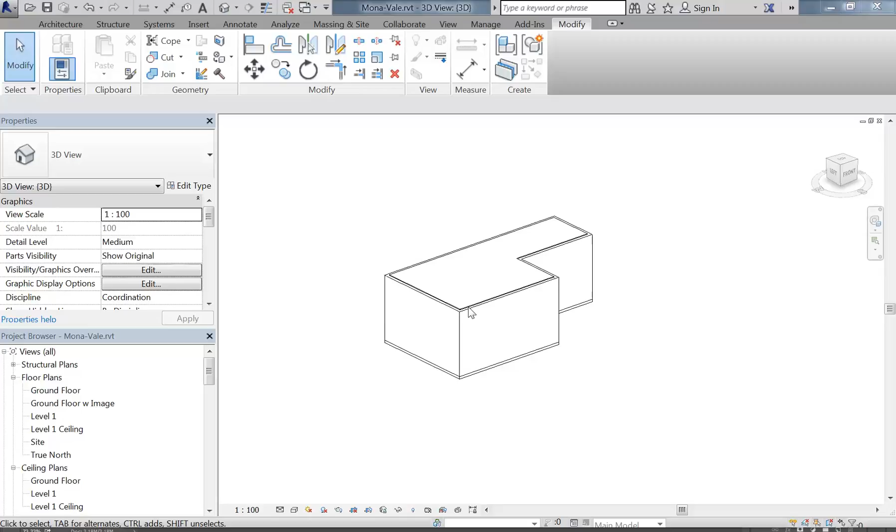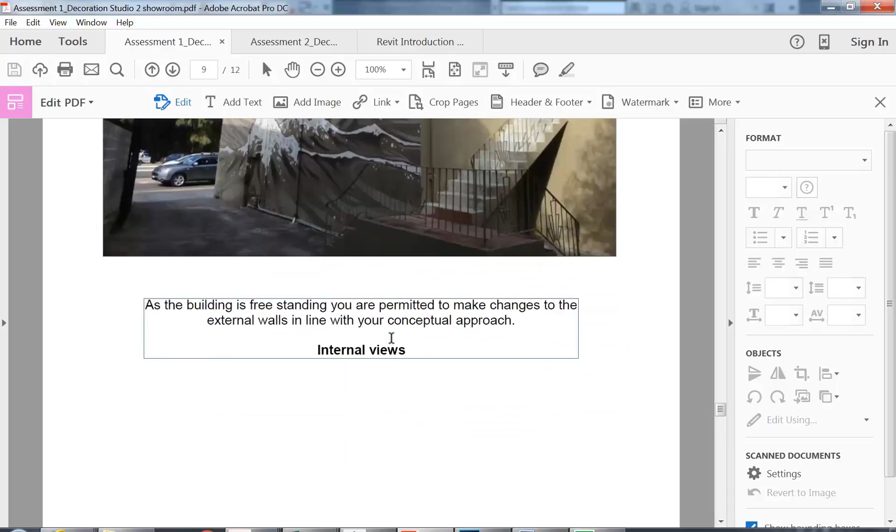Yep. So I've got a flat ceiling there, and that then is going to sit underneath my roof, and we've got then the pictures here. That's a different building, sorry. This picture here, going back, will show us the profile of the roof, but on the parapet wall, and the roof will sit behind that. Now, we don't know the slope. I'm going to have to just guess that.

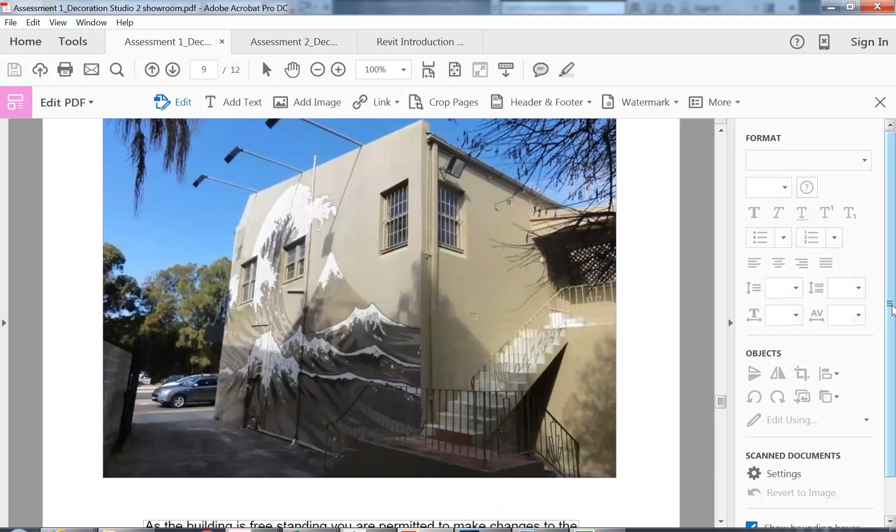And I would actually use a different tool for this normally, except for the fact that at the front there, you've got this kind of nice little detail. Well, don't know if it's that nice, but interesting detail where it slopes up from the side, and you'll need to work out a way of doing that. So I thought that's a good way of really getting used to the way that the roof by footprint tool actually works. And you'll see once I show you, it can give you some interesting results.

Yeah, no, they're just kind of decorative. But it looks like it's part of the wall. Yeah, that is part of the wall. That's a parapet. And then this is really a hip, and it's just the decorative treatment they've chosen. It's not really probably all that nice, or even that common either.

I'd say probably what's happened is they might have even had a parapet going all the way across at one point, and then they've decided to break the roof out to do an eave here later, maybe. Just guessing, but this looks like it could have been Victorian originally. You never know up that way though. There wasn't a lot of Victorian stuff in that area, but there was some. So it could easily have been Victorian. Mona Vale. Yep. Yeah, but there was some up there.

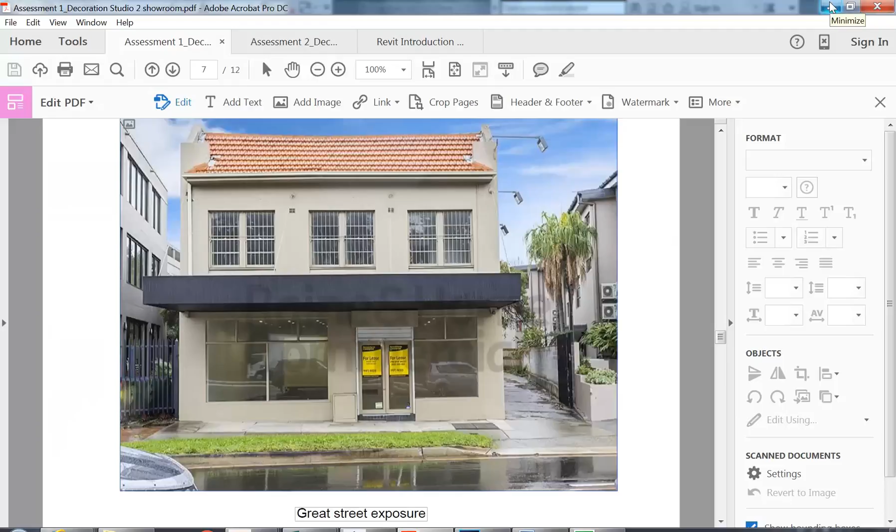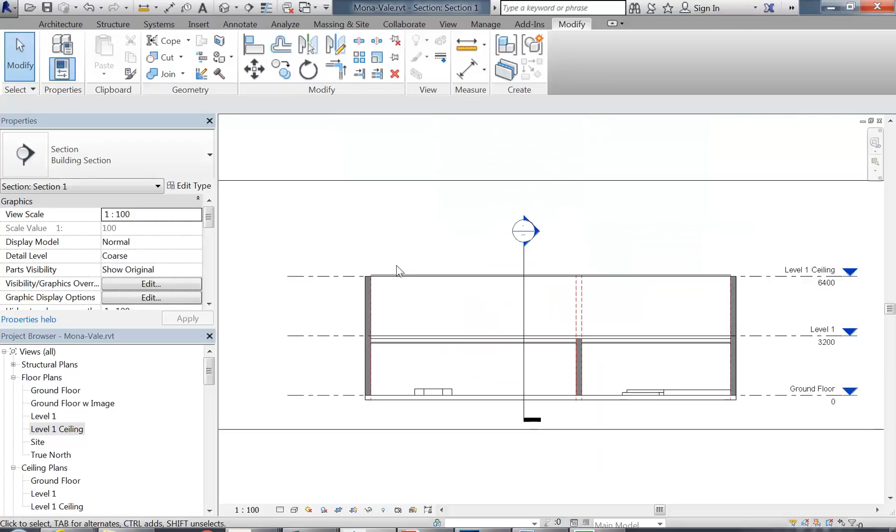So, starting point would be to get the main form in, and then I'll try to show you how to modify it to get the pitch, so also those hip bits on the side. So level one ceiling is the one I've made for my ceiling. But remember, the way that roofs are often made is to have the rafters sitting on the wall at the same height as your ceiling. So you can use the same level. And I'm going to go to the menu and just show you, I'm using roof by footprint.

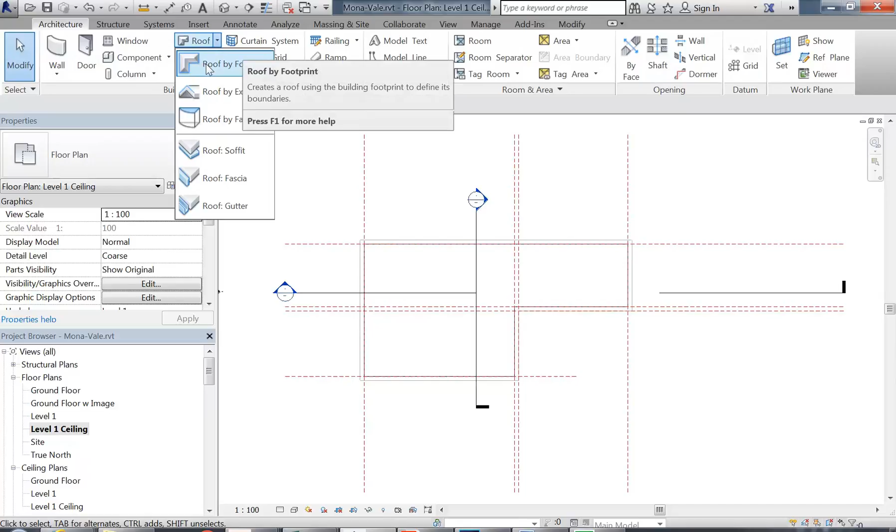And I'm just going to guesstimate those slopes. The first part will be really easy once you see how it makes these forms. So we'll get the slope here and here without much trouble at all. So that's the easy part. I'm going to use pick walls and pick the outside edge of this wall. And it's probably more than 30 degrees. I'd say it looks like about 60 at the front. And then at the back,

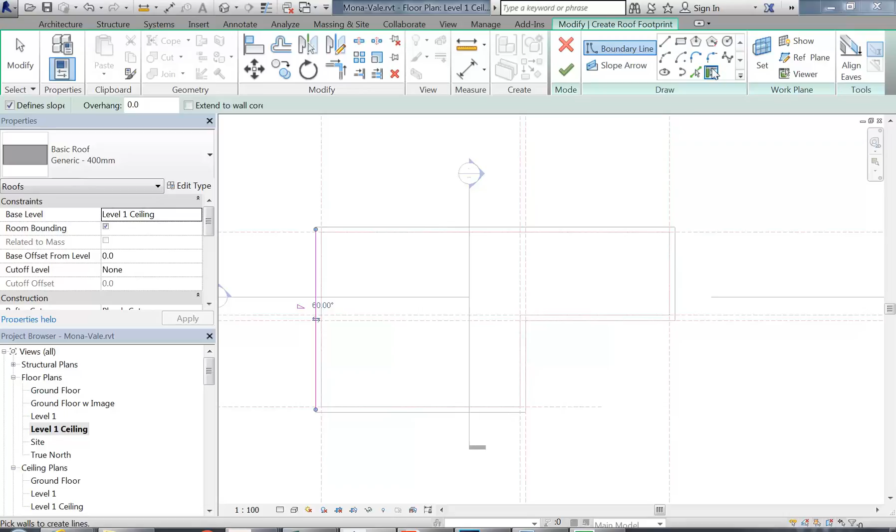or here actually, let's look at that image again. So to there is the first roof, and then we've got another roof at the back that's different. In fact, it's probably not even two-story there, so I've made a mistake, but again, easy to change with Revit. So pick walls again. I'm going to pick this wall, and we'll try 10. It's probably not right, but just to give you the basic idea. So they're the two edges I definitely need a slope, and now I can turn the slope off and pick the walls at the top.

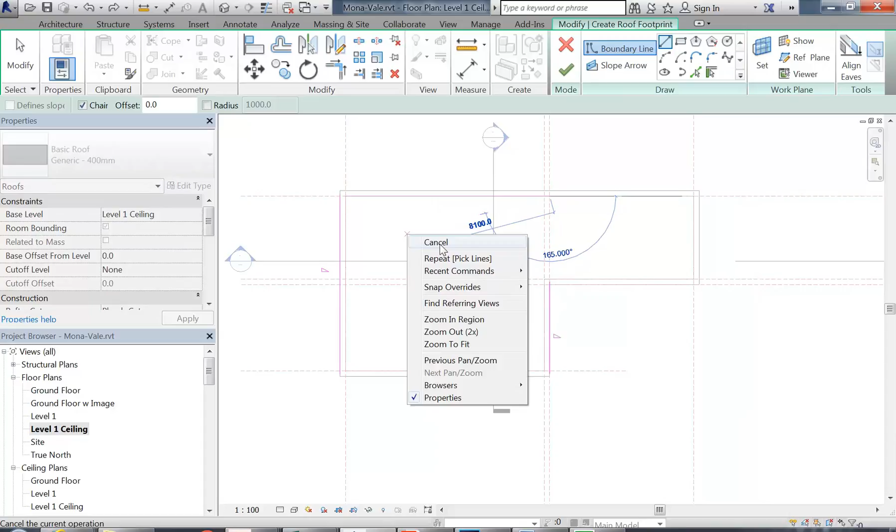Now there, that's on the wrong side, but notice how if I flip it, it's going to flip this one too, and I don't want that. So when the wall or the edge you pick using pick walls won't go where you want it to, remember you can always use pick lines, or sometimes it's even easier just to draw a line. So you don't have to use pick walls, and drawing lines is fine. So there, I've drawn the edge where I want it to go. Remember, the roof edge needs to sit inside the walls here at the top and the bottom.

So here the roof comes out beyond. Now I'm going to fix that side too in a minute, if you're wondering about the eaves. We'll look at that in a second. But I just want to get you started. So if I use trim, now I can join these together and make a simplified version of the roof. So that's a rectangle.

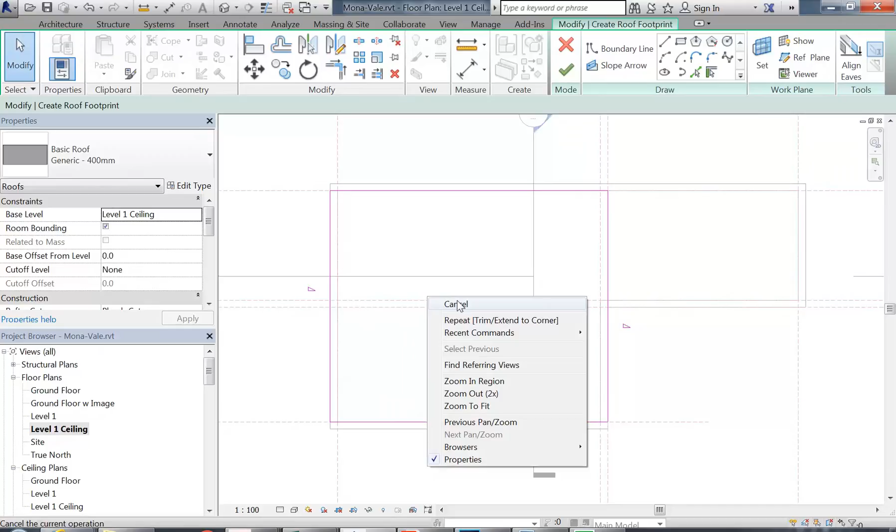And again, just want to make it really clear how the slopes work. So the slope is just again from the left and the right, nothing from the top and the bottom, and those top and bottom edges sit inside the walls. These two edges sit on the outside of the walls. Tick to finish, and then in 3D, got something similar to what you can see in the image. So you've got a greater slope there, and then a lesser angle here.

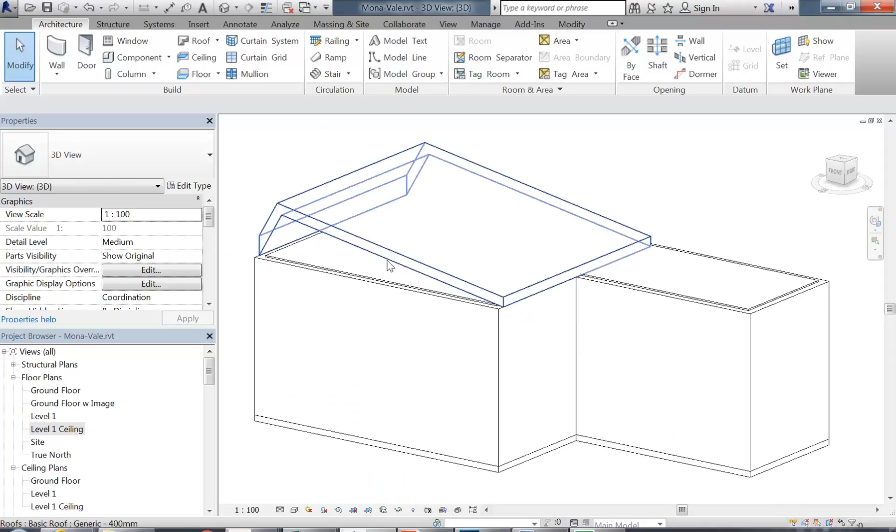So not far off actually, but still probably not quite right. So I can always select that, edit footprint, and I'll try, maybe it's 58 degrees. And maybe this is a bit less too, maybe that's, oh no, that's pretty steep. So I'm going to tick to finish and just see if that's better. Yeah, probably a bit closer. And now we can experiment with that.

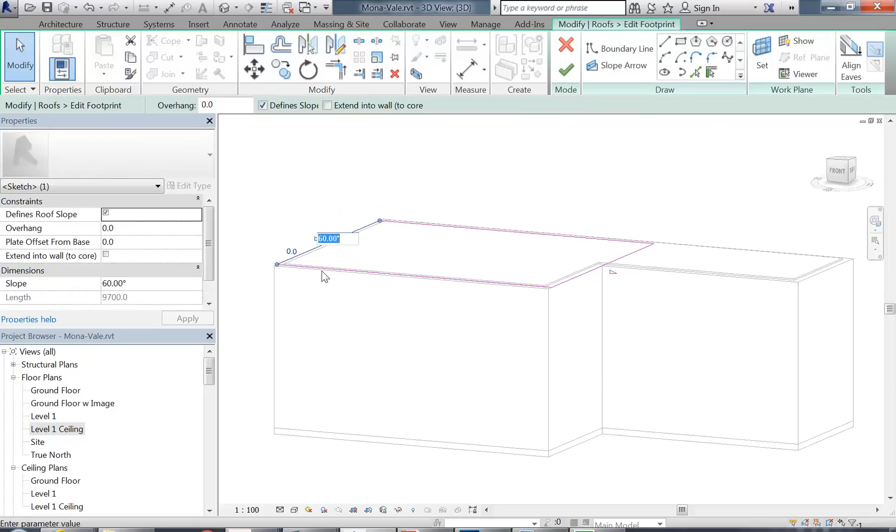And I think actually that does need to slope a bit more. So edit footprint, and I'll change that to 55. That's probably better. So notice how this ridge height is just wherever those two angles join together. And I might make the roof thickness less by just choosing one of these thinner roofs. Generic 125 probably is okay.

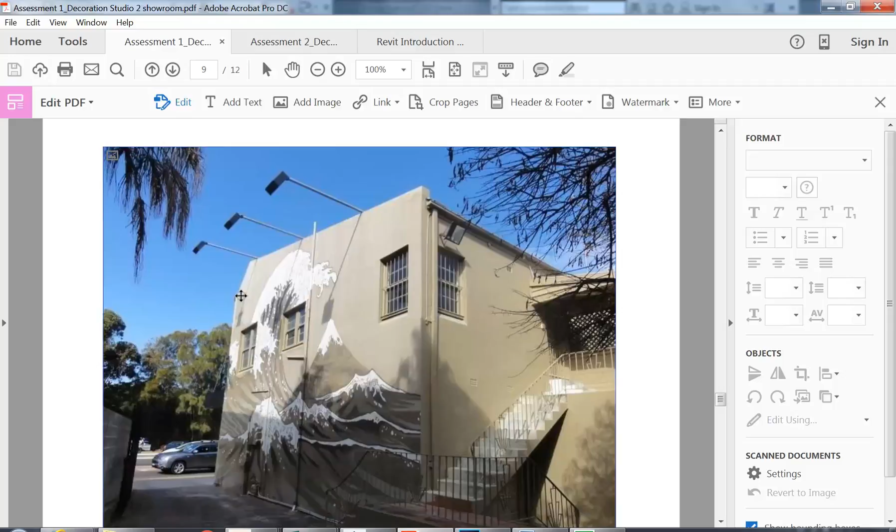Right, so then we've got, and actually let's even look at that a bit more. That could be maybe even 50. So I just want to try and get that pretty close before going much further, because the next bit is a bit more complicated. So I've got a slope there that I'm happy with. But then looking at the front facade, we've got that strange eave. So how do you get that to work?

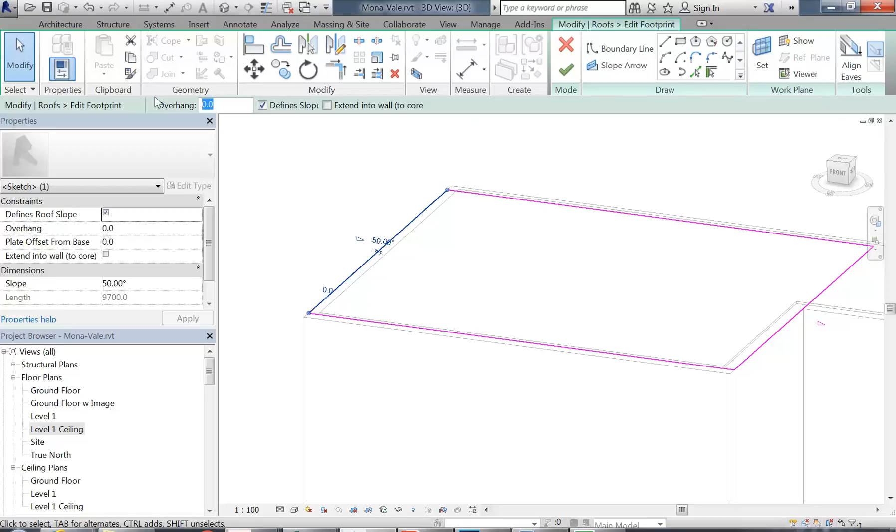So back to the roof tool and edit footprint. I'll start by selecting this edge. And if you're wondering why they even give you this pick walls option instead of just letting you use pick lines, it's so that you can put in automatic overhangs and things like that, which you don't get with the other options. So there I can put in what I think the eave is, which is maybe about 400. And it'll just bring that edge out automatically from the wall. Tick to finish. And there you can see it's done that.

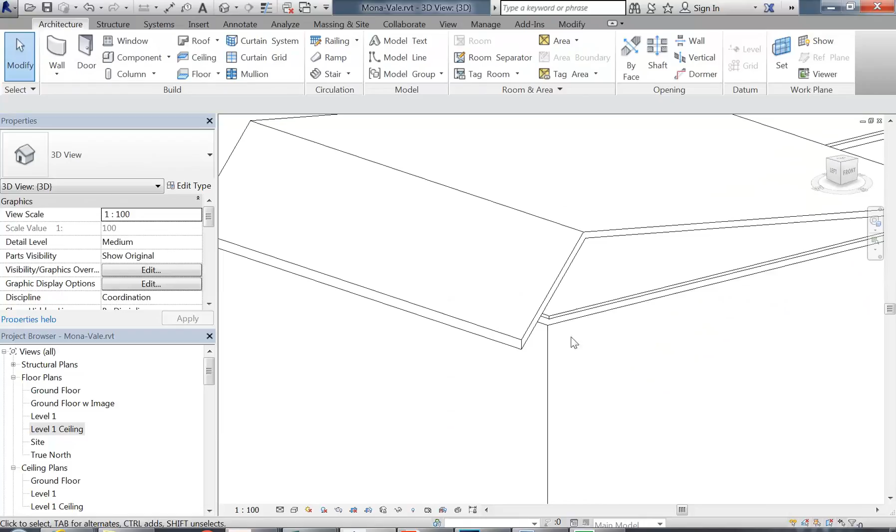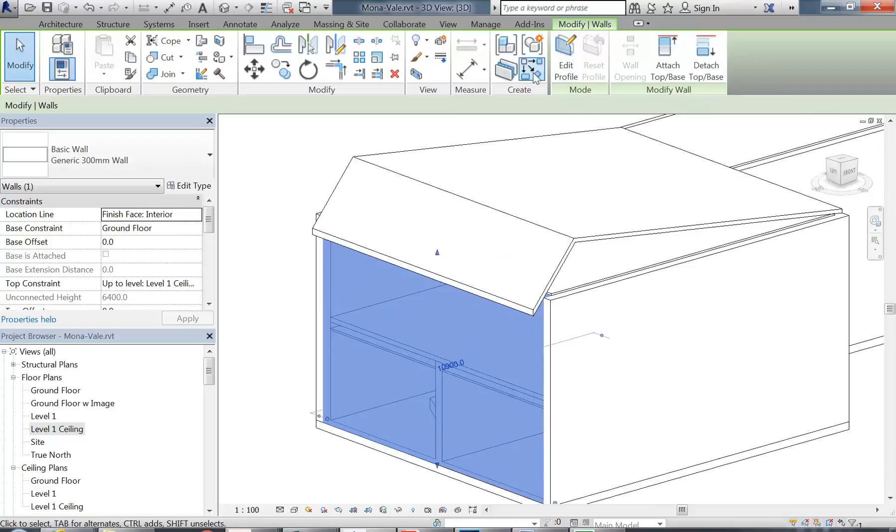So now I want the little bit of the parapet that comes around there. So with the wall selected. So any wall that you make in Revit will give you this option, which is extremely useful, to change the shape of the wall in elevation. So again, clicking anywhere on the edge of this wall, that option there, edit profile, is going to come up. One of the most useful options in Revit. You'll see you'll use this all the time. And I'm going to go into the plan view.

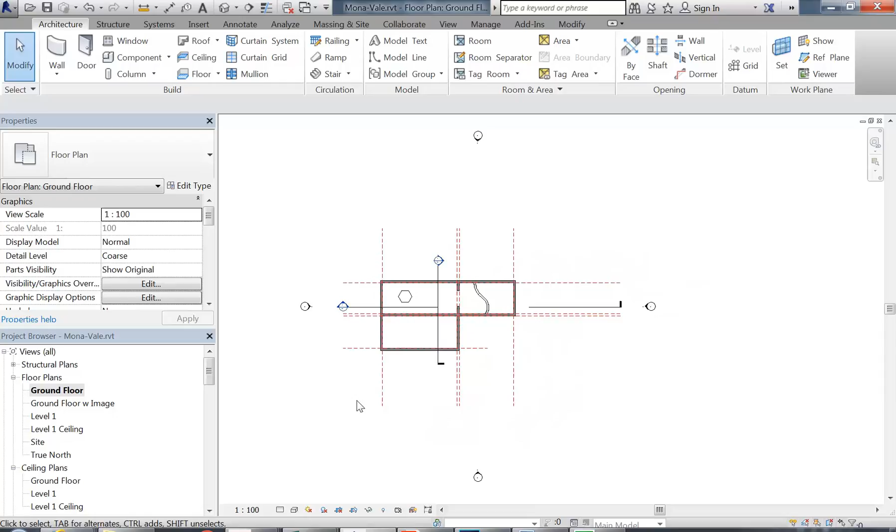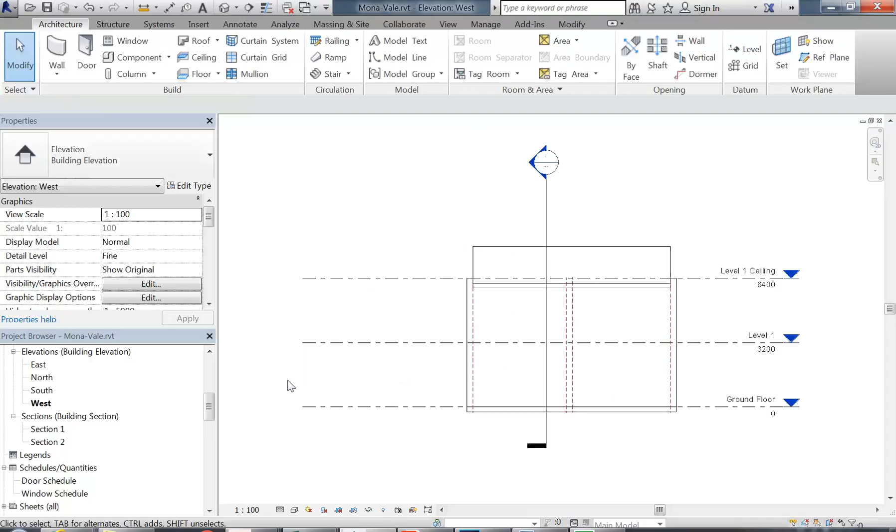So maybe just thinking a bit more about the elevations. Which side was I just looking at? Which is the front? Which elevation? North, south, east or west? West, exactly. That's right. So that's the way you want to be thinking. So west elevation there. I can go to it in the project browser and just double click on west. But if you just want to look at the arrows or look at the views in your plan, you can double click on the arrowhead. There's a quick way of opening up those.

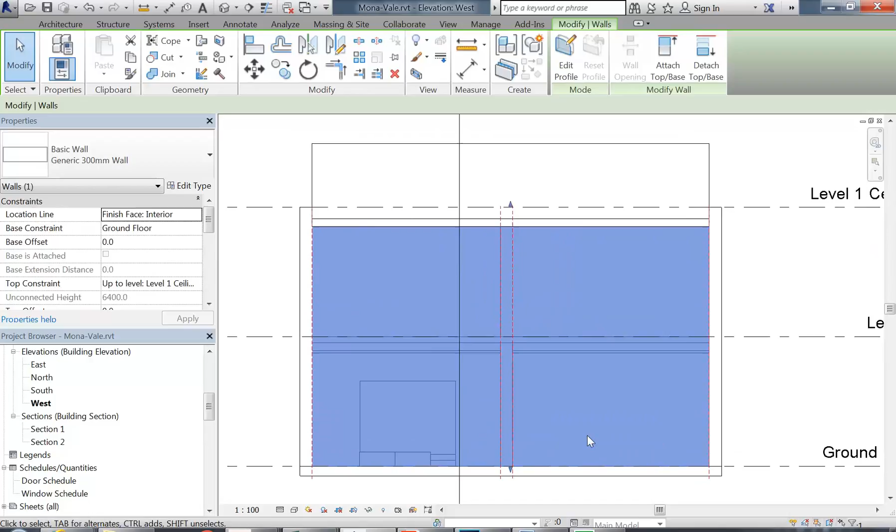And now I can see my wall from the front and just select it. I could click on the edge, but it's giving me the floor. So remember, the option key tab will let you switch to something else, in this case the wall. And then again I can use that edit profile tool and draw in the parapet, just like you can see it in the picture. Now don't worry about the fact that it's joining in the middle, just ignore that. Revit will take care of that.

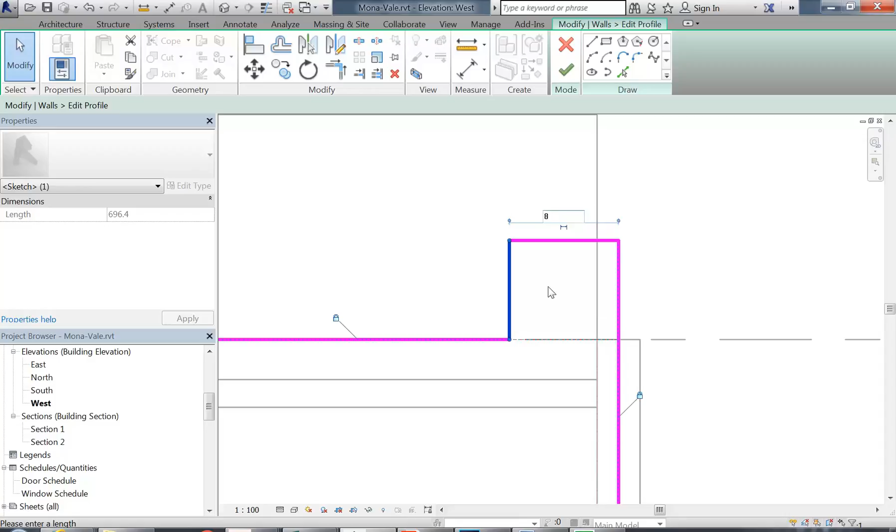So I'm going to join these together. I'm not being too fussy about the exact sizes here. I might make that a round number just so I can do the same on the other side. 800, that'll do. Okay, so things like this, you're not going to be changing that part of the building most likely, so don't be too fussy about the way you draw it. It's just to give an impression.

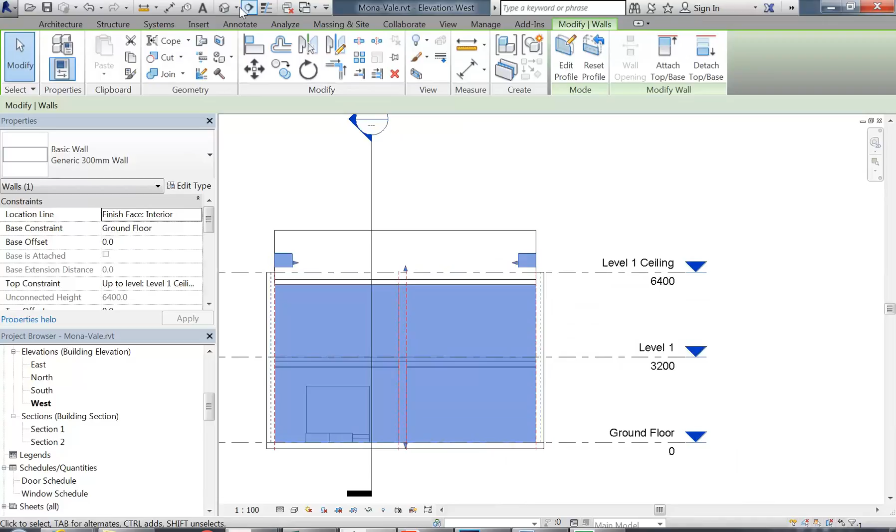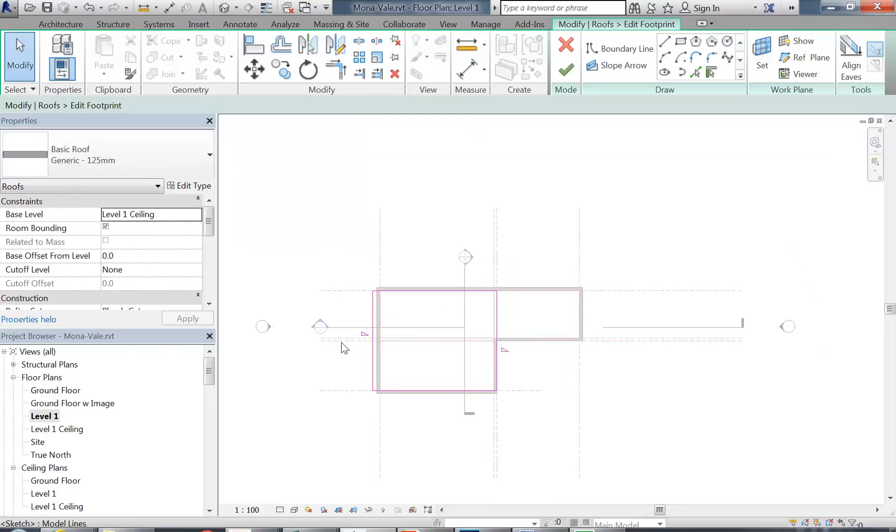So I've added that to my walls, and if I finish it now and look in 3D, you can see that part projecting. We're going to bring this wall up separately. So I'll leave that for now. But then what I wanted to show you with the roof is that I can go back again to Edit Footprint. So in Plan, think about what's happening with the slopes. Can you think about where it needs to slope from to get these little bits here?

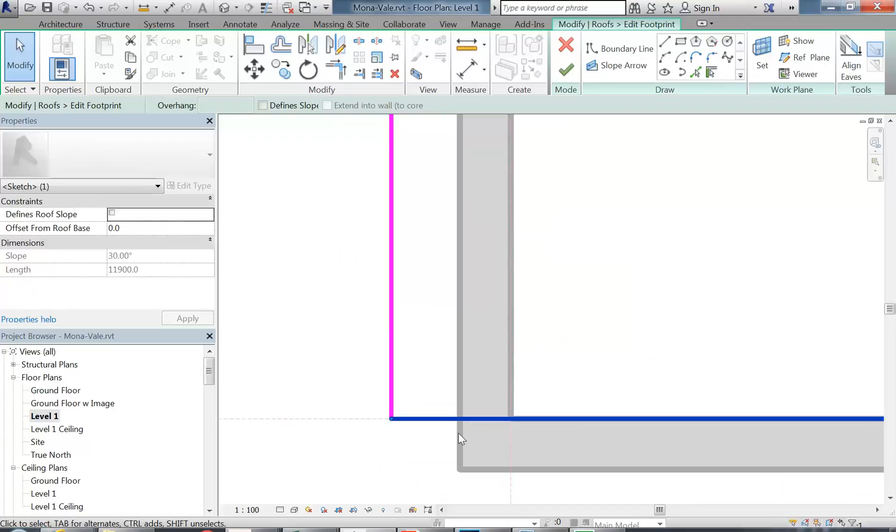Well, from the end of that little wall, the top, yeah, the parapet, from just near there, yeah, that's right. So yeah, exactly there. So this part here, the part that sticks out, needs to slope. So I've got to break that line so that I can make just that part of it slope. And so if I use split element, then I can break it there and up here as well. And then I need to know the slope here was 30. It's got to match. So I'm going to choose this edge, tick define slope, and make it the same.

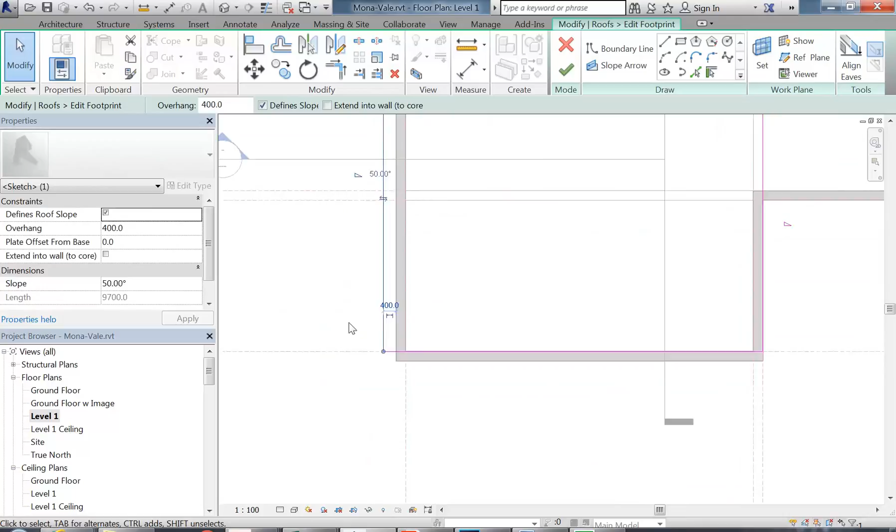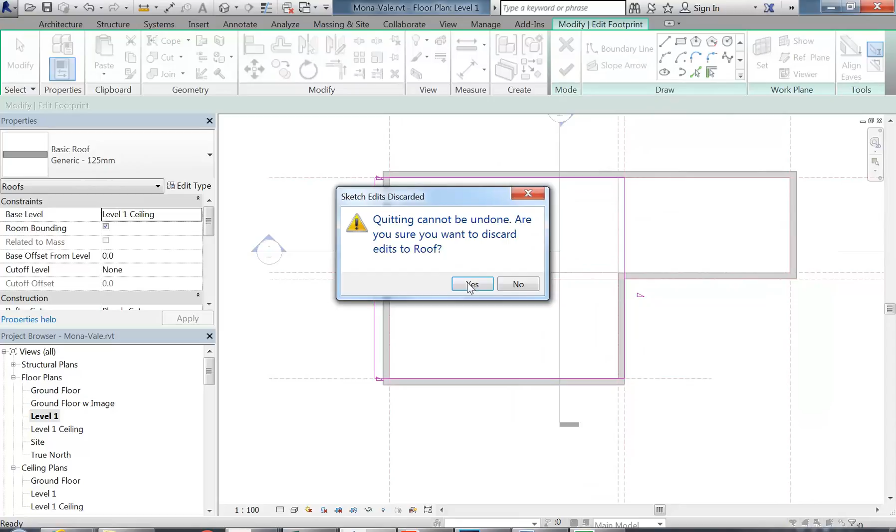So same here, tick defines slope, and make it 50. Done. So tick to finish. Now it's got a problem. This happens sometimes. It can't make it as one roof. Right, so the trick there is to make two roof shapes and join them together, which is always an option. So, okay, I'm going to cancel that. Sometimes it is just too confusing for Revit.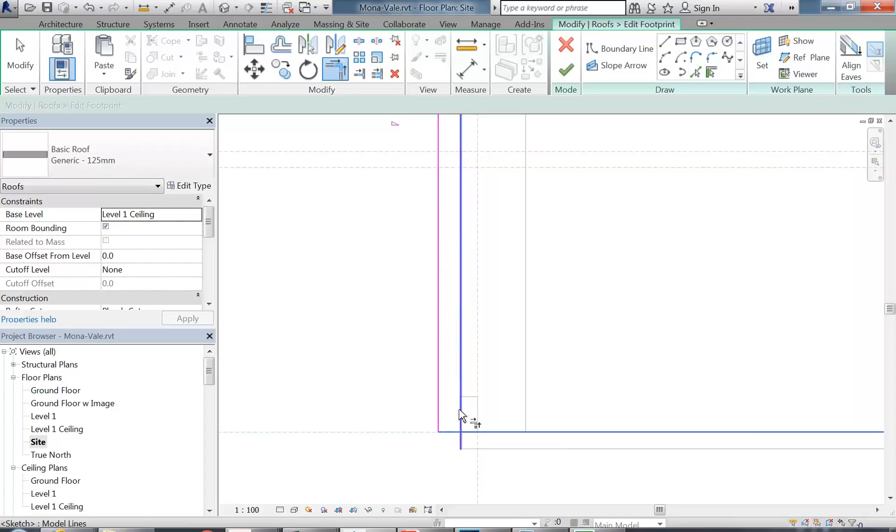Okay, so trick there. Copy to clipboard, and then paste aligned to same place. And this is something you need to do quite often in Revit, so that you can make two copies in the same place. And then I can just go and edit the first one, get rid of these lines, and then make it just for that first section. And so quite often this is what you need to do when you have different roof shapes. You can make more than one roof, and again just connect them afterwards.

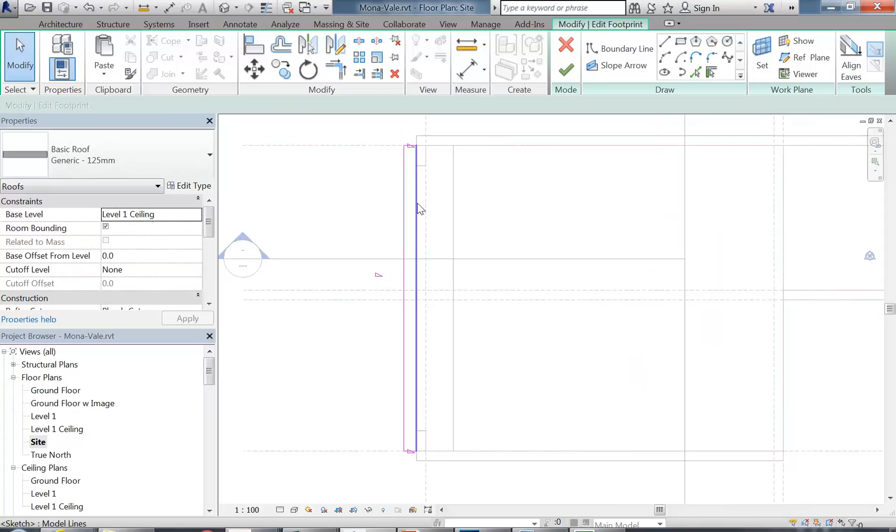So define slope for both of those, and they'll all be 50 degrees. Why doesn't it? That's not right. It should be able to make that no problem. 50. My depth isn't enough. That's why it doesn't like that. So this edge here would need to be further out.

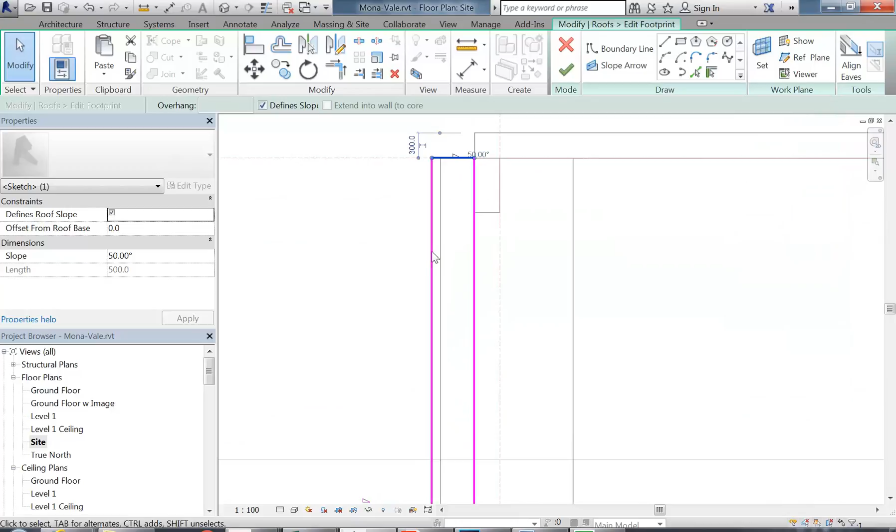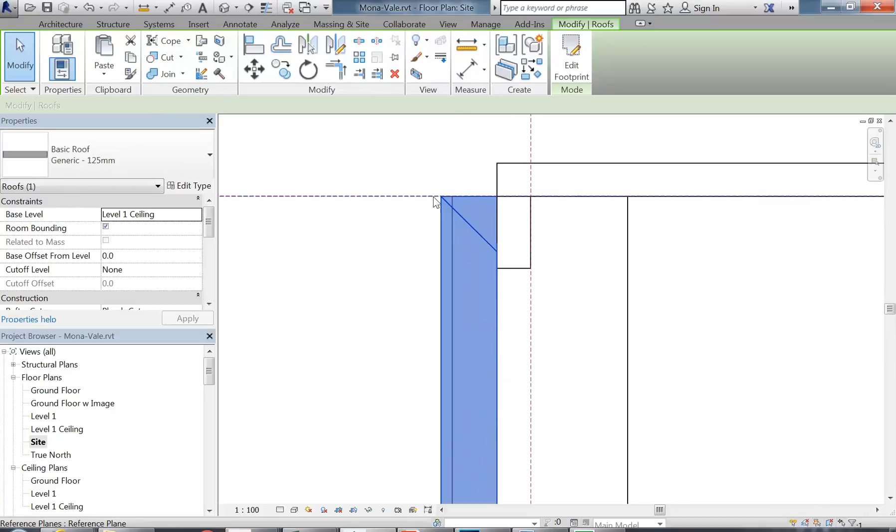There we are. And so even there, okay, this is where it gets a bit technical. This edge here is done with, don't want to get too technical. I'm just going to delete that line and draw it again. It's because I made it with pick walls, and it projects from a different height. And so the easiest solution there is just to redraw it as a regular line, and then it will be capable of doing what I want. So notice how now the line there is on from the corner, not from the setback. And so now this roof can be modified to not include the overhang.

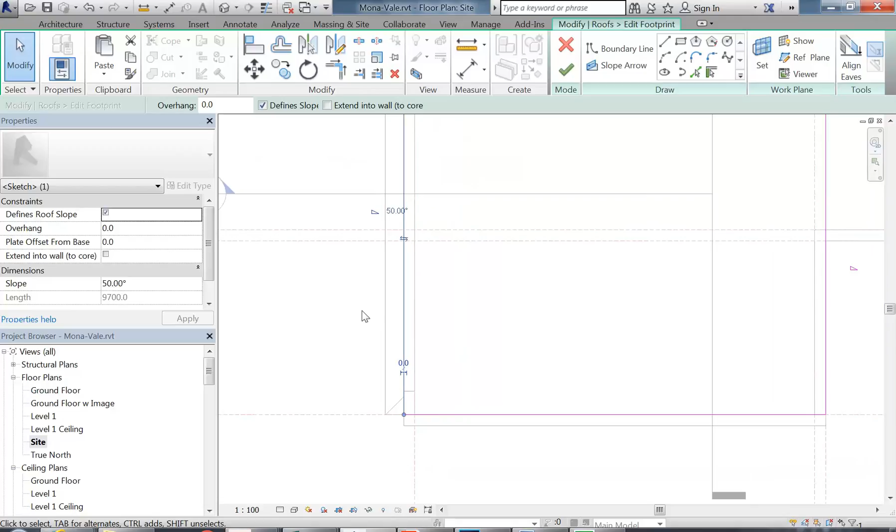So you bring that one back in? Yeah, and it could even go behind the parapet, optionally. No, I won't do that. I'll just leave it there. It'll be simpler. And so then back to my section, and this can come down now, just to line up with the move tool, and then join geometry. We'll make them appear as one continuous roof. There we are.

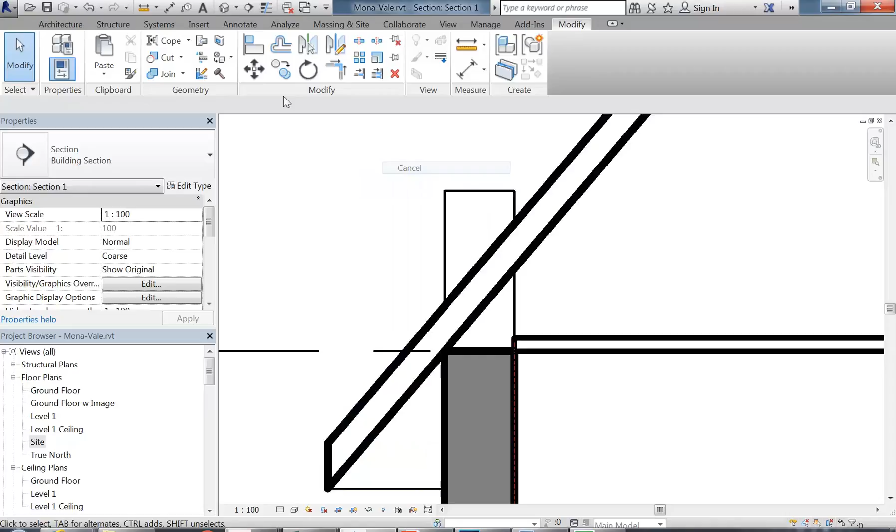And actually they might even have different slopes. That could change slope. Actually you can see there the parapet's a bit steeper than the roof angle. So I'll go back and adjust that later maybe, but just want to give you the basic idea. So thinking about the tools I've just been showing you, what do you think you could possibly do then to make the wall on the side look like that? So I want to add this slope to the top of the wall. So you want it to go over, you want it to have an overhang. Yeah, it's a parapet extending above the roof. That's what a parapet is.

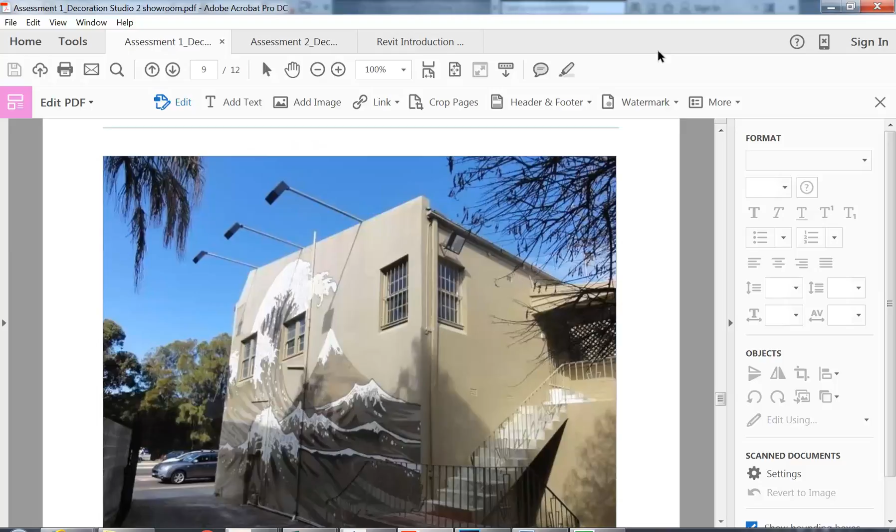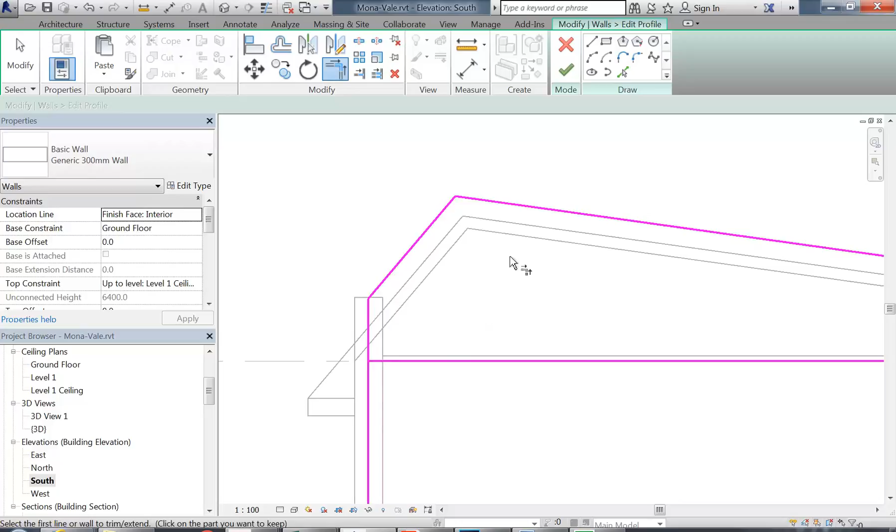So, same tool I used before to do the other parapet. Edit profile. Yeah. So if I go to edit profile now, this is usually the method, and same with your ceilings. Make the roof to get the slope, and then you can follow that with your walls and your ceilings and anything else. And so now I can pick lines and put an offset. I'm just going to say 200. Pick the edge of my roof, and it'll follow that angle, and then I can join these lines like that. And we don't need that one anymore. Tick to finish. There we go.

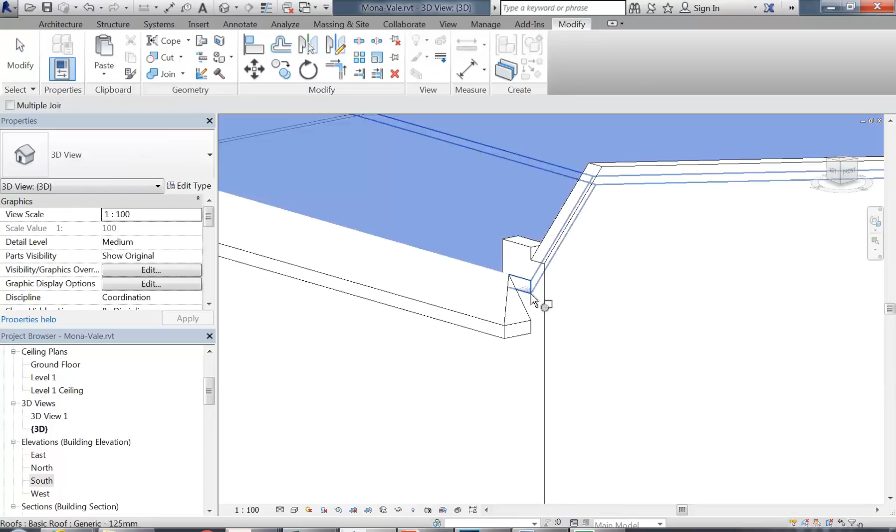So probably need to fine tune some of these heights to join it all together properly, and look at joining the roof and the wall there. Or no, sorry, I'll show you another way of doing that later. That actually needs to come back. And actually I'll show you that now. It's a really quick thing. So there, to go around the parapet, it's a bit of a trick.

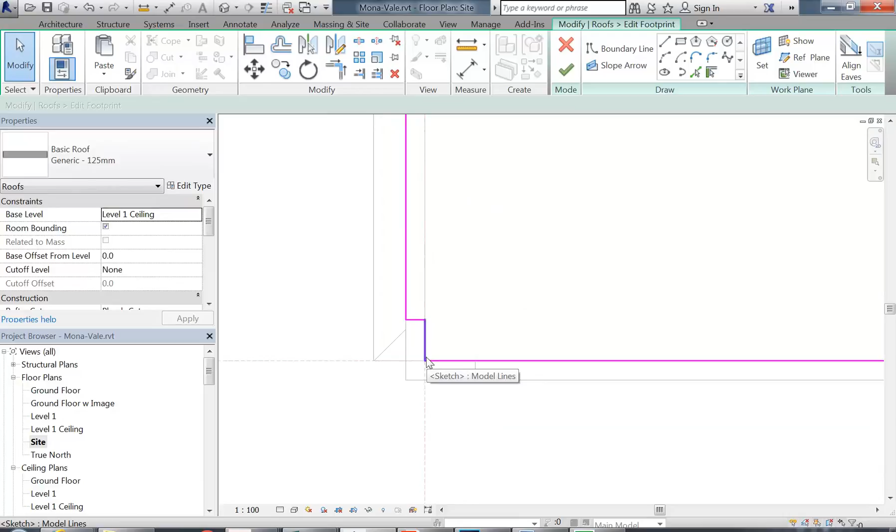You need to have the edge like this, but where people get into trouble is overthinking it and thinking that you need to have the slope from here, when you don't. It will work properly if you just have the slope from this main edge at the front and don't put a slope on anything else except the back. So back to here, I can just draw, in fact I'll just draw lines, I won't even use pick lines.

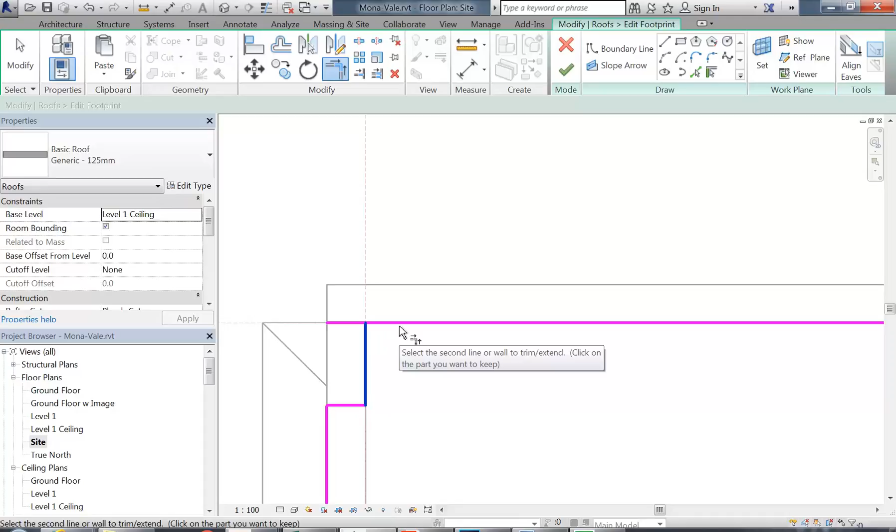So you're just trying to think about how it is built in reality. You don't always have to model it exactly that way, but usually it's going to be easiest if you can. So there we are, that's brought the roof back behind the wall. And then the very final thing, we've got a bit of a funny join there.

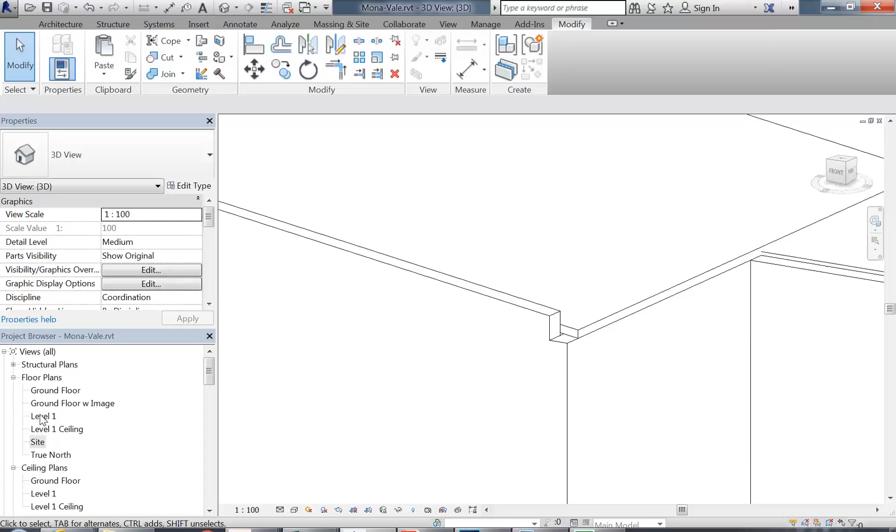So there's one last option you probably haven't thought about a lot because you would have been using the automatic joining. If you have a look in your plan view, you can't tell just by looking at it how those walls are joining together. We know they're joining together, but which wall is going through to the end, you don't know. If I select one of the walls though, then you can tell. This one is. This wall stops there.

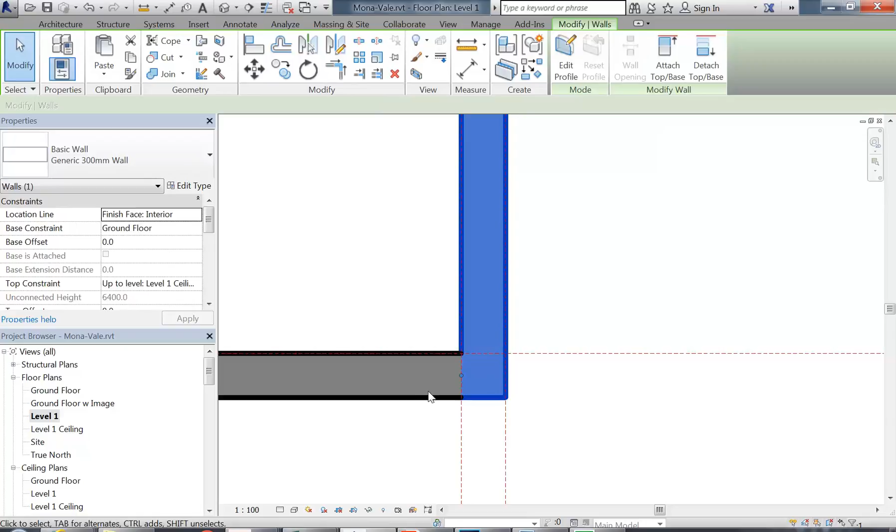So how do you think Revit decides that? How do you think it decides which wall gets to go to the end and which wall doesn't? It's to do with the direction you draw the walls in the first place. So often you'll need to come back and adjust that afterwards, and you have the wall joins tool for that. So when you're doing things like parapet walls for roof shapes like this, you'll often need to use this option. It's simple to use.

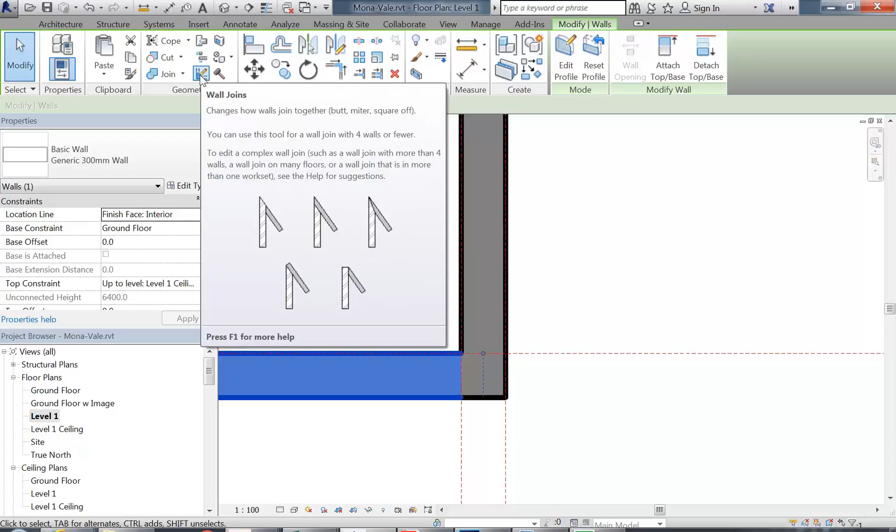You just go to wall joins. When you hover over any connected walls like this, it will give you a little rectangle to show you that it's found a wall join. Click to select it, and then it will show you which wall is extending to the corner. And often here you can just use the next option to cycle through the different possibilities.

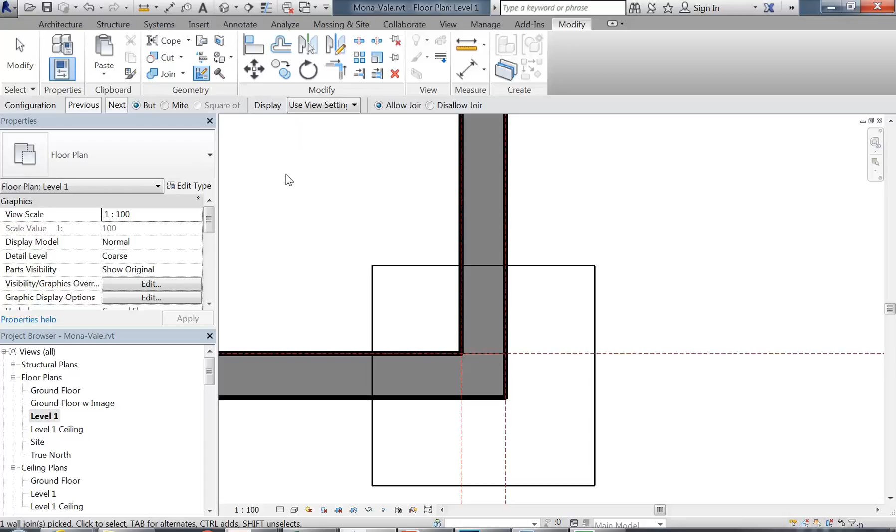If you're interested in construction, have a look at the different options you have for mitre and things like that, which can be interesting as well. But here, butt is the option you should have, and then again just using next, you'll probably get the option you want first go. So that's it, and I'll go back and show you now in 3D. That's right. So do the same on the other side. And so we're getting pretty close already to the shape of the building. So might have to look at doors and windows later, but that should give you a starting point.

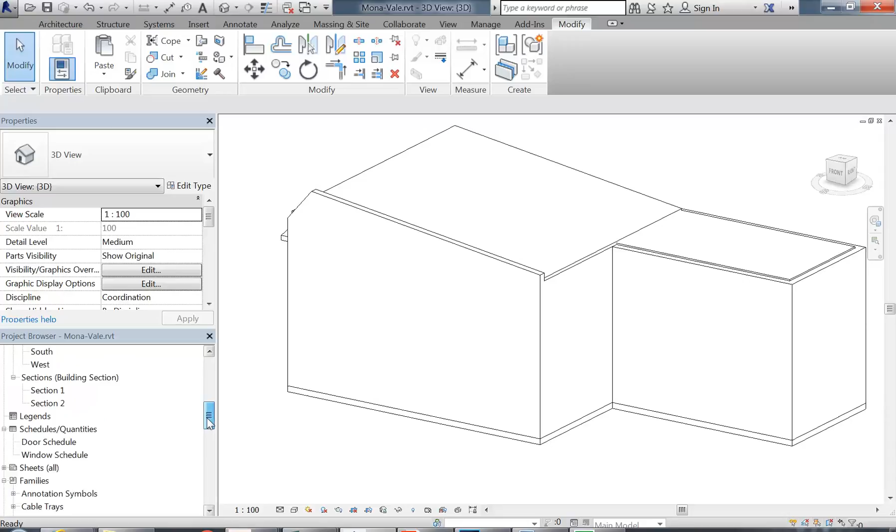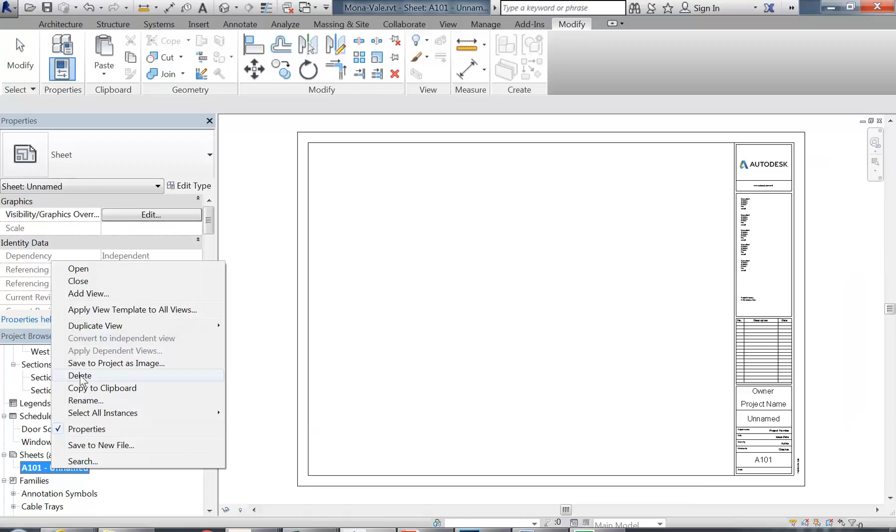And maybe very quickly, because we're going to run out of time otherwise, I'll just show you a very quick way of setting up your sheets, which we did earlier, but I just want to make sure you can all do this. You've got normally a default sheet set to A0, which is useless, because it's got this Autodesk title block anyway. So just get into the habit of deleting that, and that'll force you to make a page that has a size you've chosen. So again, that one there, A101, unnamed, in your sheets category. You right click and delete, yep, first go.

And then right click on sheets all again and choose new sheet. Then load. And I've made a lot of extra title blocks for you in the Revit library folder there. Then you have title blocks and you'll see there all these extra page sizes.

So it seems like you need to do 1 to 50s. Is that what everyone's going to need? No? Oh, yeah, true. Well, for interiors, this one says 1 to 100. The second stage of this is 1 to 50. First stage, yeah. Look, 1 to 50 is pretty standard for interiors, but it's good to know how to do 1 to 100 as well. So then, which one is it, A1 or A2? So I think A2 should fit, but A1 will give you a bit more. No, A2 should be right. So I'm going to just do A2 for now. A2 landscape.

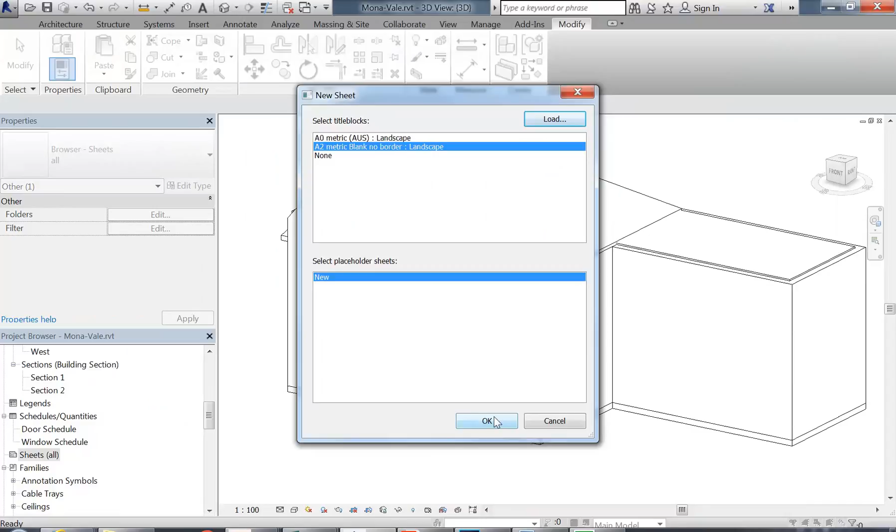So I've got here this A2 metric blank, no border, which is just completely blank, and it's landscape. So if I double click there, and OK, blank page, and even at this stage, without very much done, I could drag in a floor plan and see if it fits onto that page. So it definitely fits, but that's 1 to 100, and it seems like it's taking up most of the page.

So what do you think you could do to make it fit better when it's 1 to 50? Because at 1 to 100, it's only just fitting. If I make it 1 to 50, do you remember what to do there? You can always go back into your view.

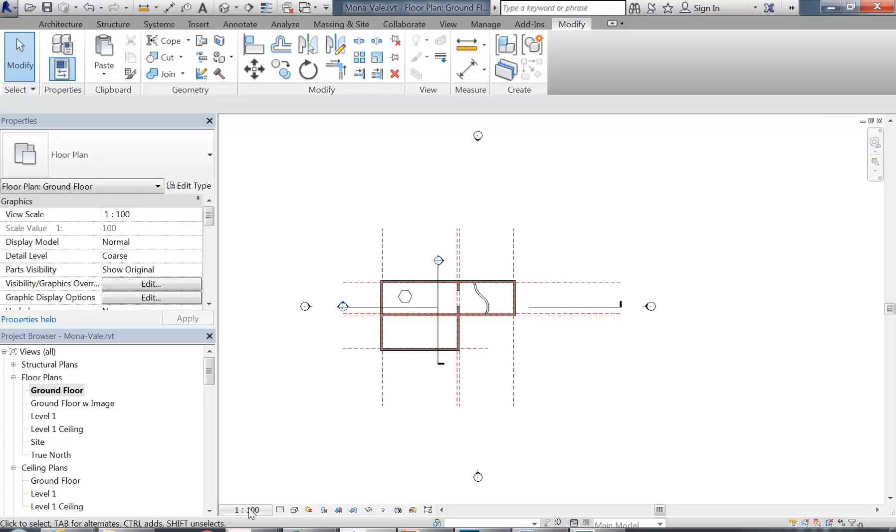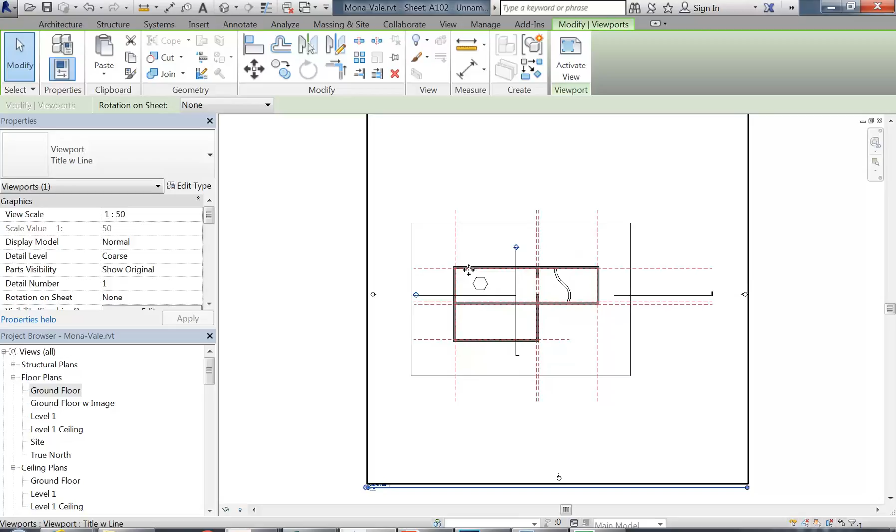And then I'm going to drag that across again. So think about what you're trying to show. This is what I'm trying to show. That's my page border, so my plan should fit on this page size. But I've got all this other stuff around the outside that's making it take up more room than it needs to.

So a good option there when you're first setting it up is just delete it from the page and go back and fix it in the view. So yeah, delete the view, that's fine. You can delete the view off the page, that's okay. So I'm going to duplicate this view, and hopefully this is something you'll get used to the more you do the class with me, because I do this all the time.

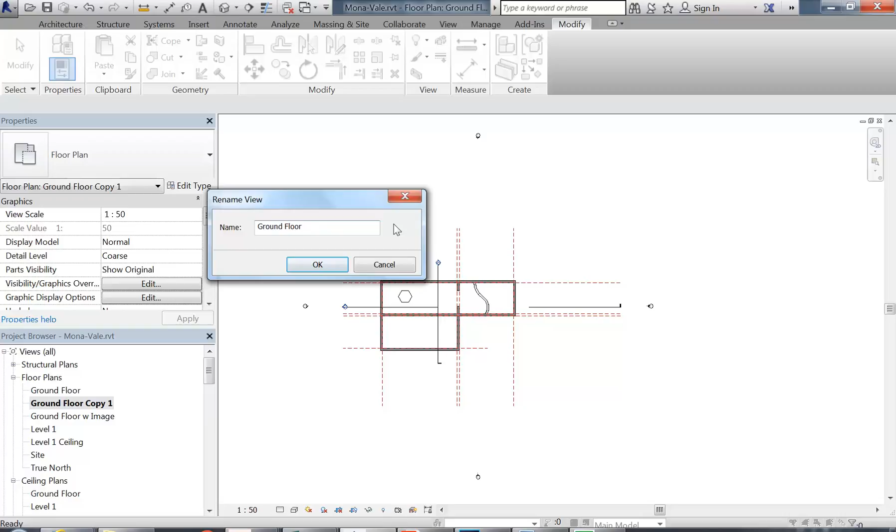Right click on any view and you can choose duplicate view, and in this case duplicate is all I need. Right click and choose rename and call this ground floor print. So I'll set my scale, make sure that's 1 to 50. The reference planes can be hidden. So if you select one, right click, hide in view, category. That'll hide all of them.

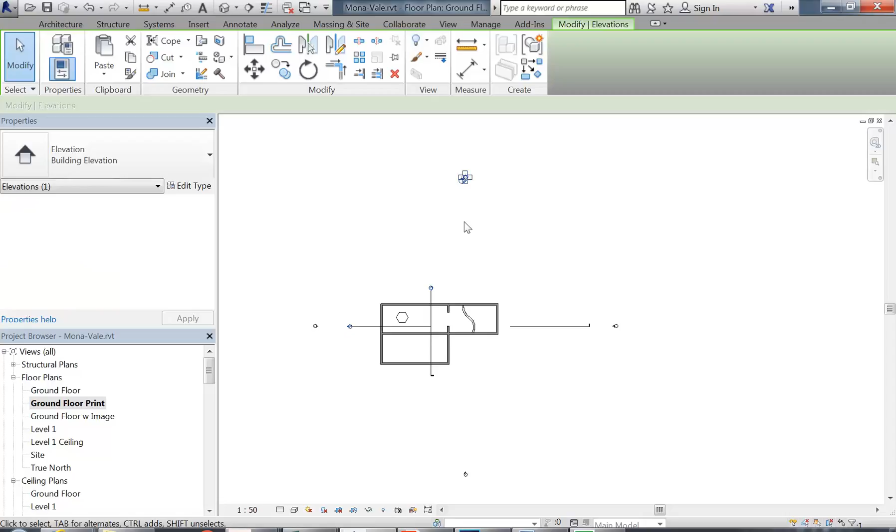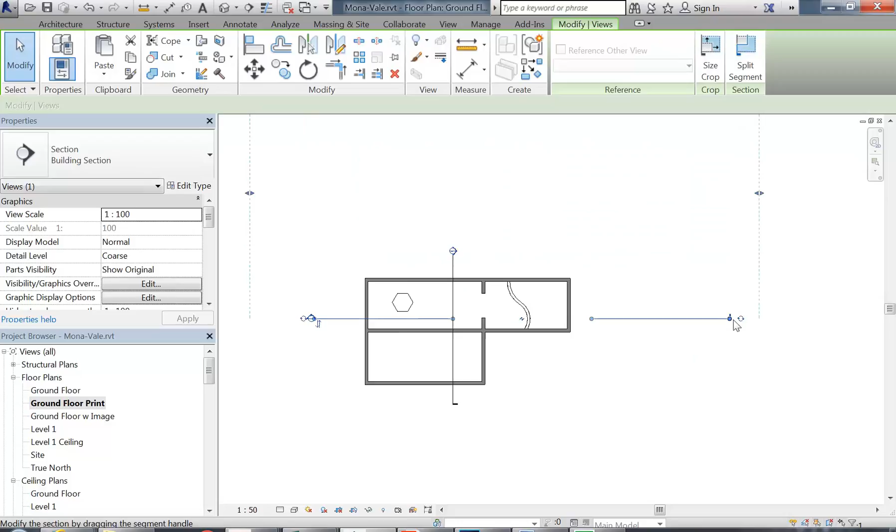What about the elevations? Do you think for an interior design project you need to show exterior elevation symbols in your floor plan? These symbols? No. For interiors? No, definitely not. You might need interior elevation symbols later, but not exterior. So again, right click on those, hide in view, category. Take out anything you don't think is necessary. Section lines, probably do want those. So shorten them so they're not too long. So all of these things make the plan take up less space on the page.

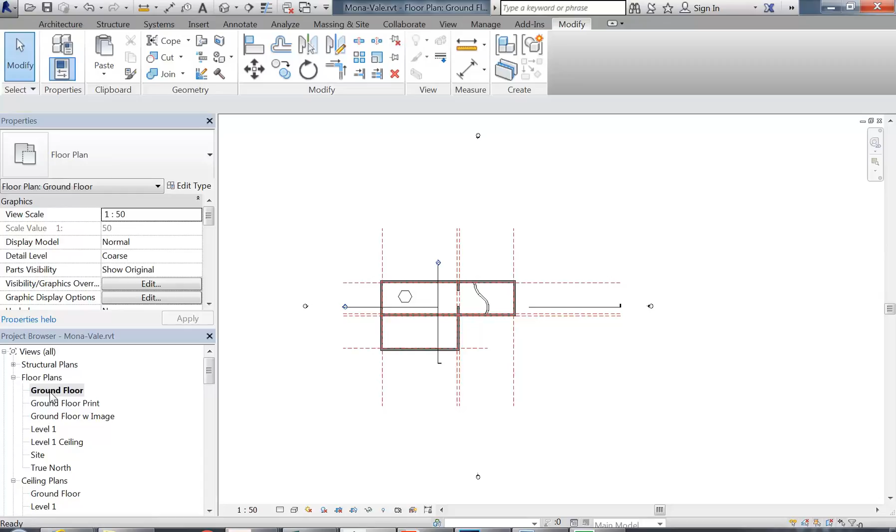Whenever you change the ground floor plan, they will automatically change the print? No, that's the whole point. So if I go back to my original ground floor, you can see it has everything still showing. That's why I duplicated the view, so I can just change the graphics here. But if I go and add walls, they will show up in all of the views. Okay. So it's only these graphical things that are different. Yeah, but I mean, if the ground floor walls layout changes? Oh yes, that will change. Yeah, exactly. That's right.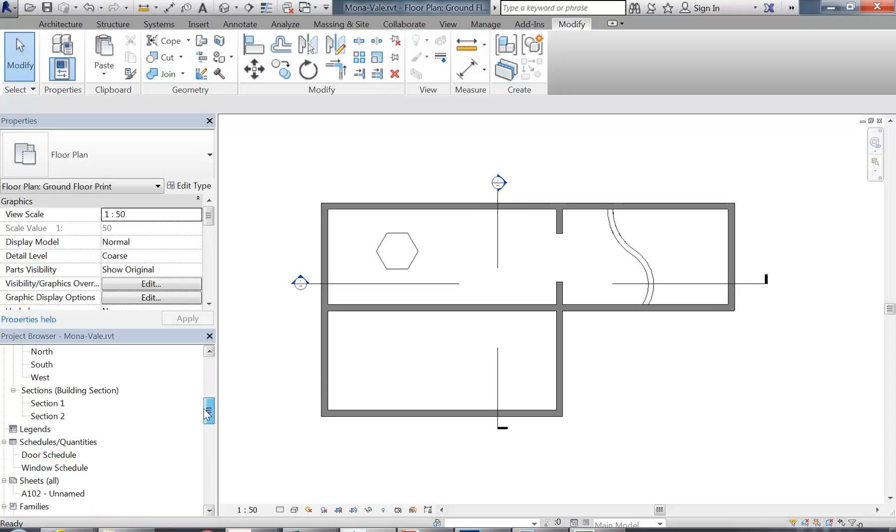Okay, so see how much cleaner that is? That's my ground floor plan with the things I don't need hidden. And if I then go back to my sheet that I know is A2 and drag ground floor print onto that page, how much better is that? So that's ready to print, and that will always be there.

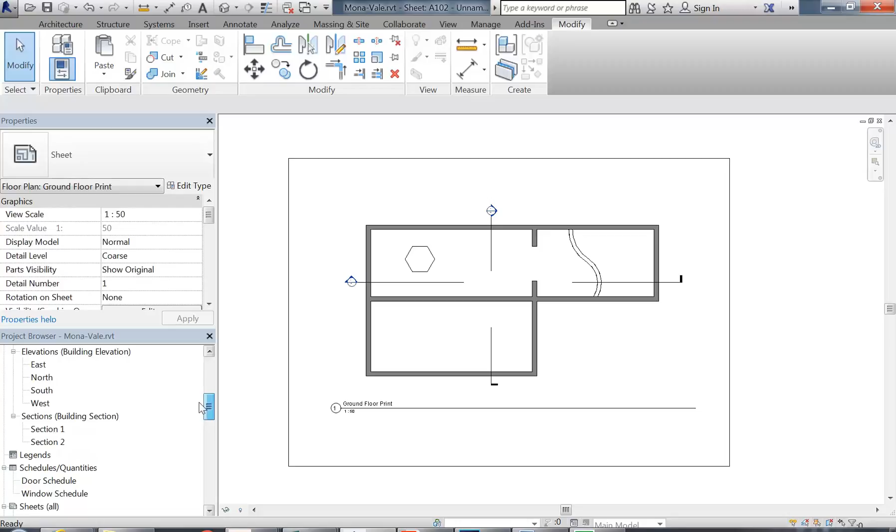And so what I recommend usually is that you set these views up before you try and do all of your design, or even before you model the whole existing building, because you can do this at a really early stage. And don't just do it for your ground floor plan, do it for all of your floor plans and your sections and other views as well. So maybe I'll just repeat that process for a section view, because it should then make it clear to you how organised your views are.

Can you go back a step? I got lost. I deleted my sheet. Yep. And then you went to load. Where did you load? Yeah, so once you go there, right click and then new sheet, and then load at the top. Yeah, and then go to the title blocks folder in the Revit library. So that's your default library, but if you go to Revit library on the P drive, there's more.

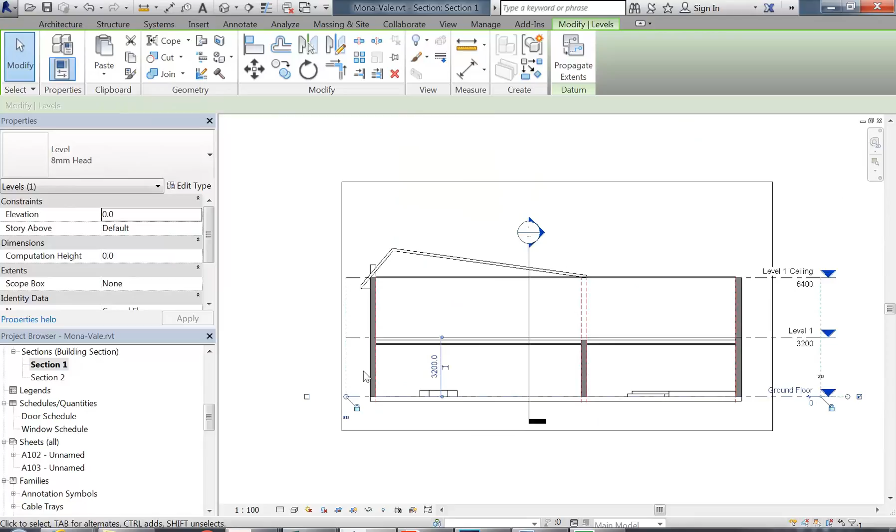Okay, so I'll open up a section view so that you can see it probably doesn't need as much tidying up as the floor plan usually, but you can still do some things like shortening the levels and maybe bringing the outside border in. And maybe the section line there could be hidden just like I hid the other things in the plan.

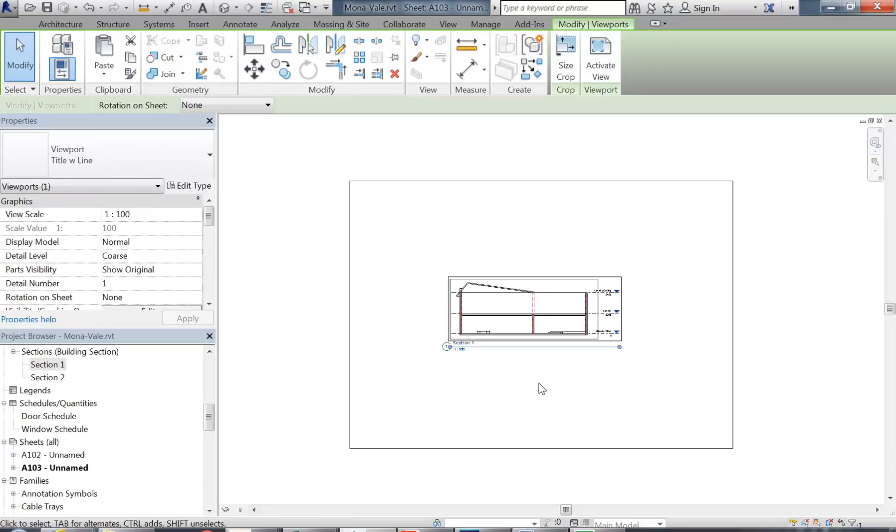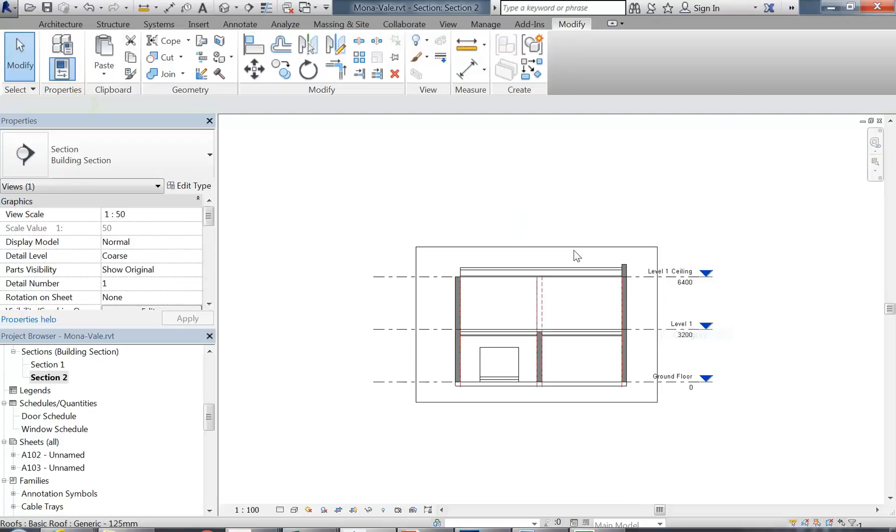Okay, so now I can drag section 1 onto the sheet. That's 1 to 100. If I select it, I can change the scale to 1 to 50, even after it's been placed onto the sheet. So there we are. And we could probably have 2 sections on that page easily. Why is my section view box so long? That's just the way it starts out, so you just bring that in to suit your building.

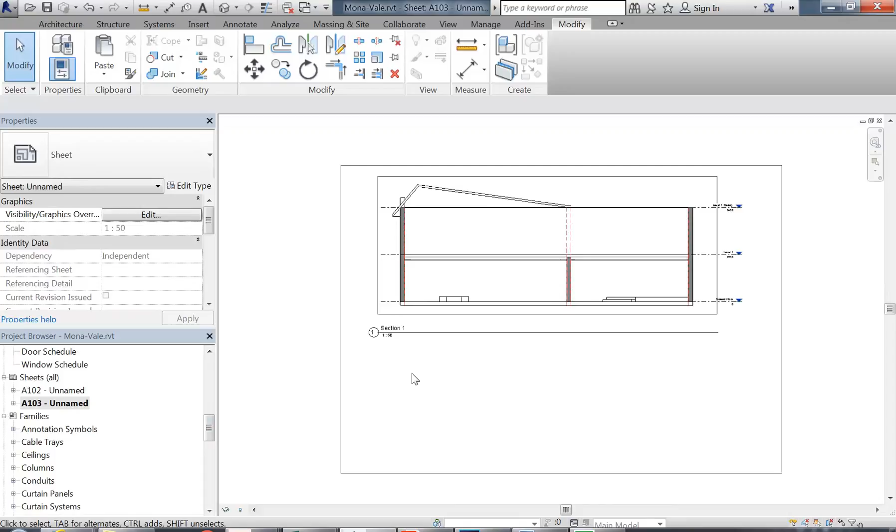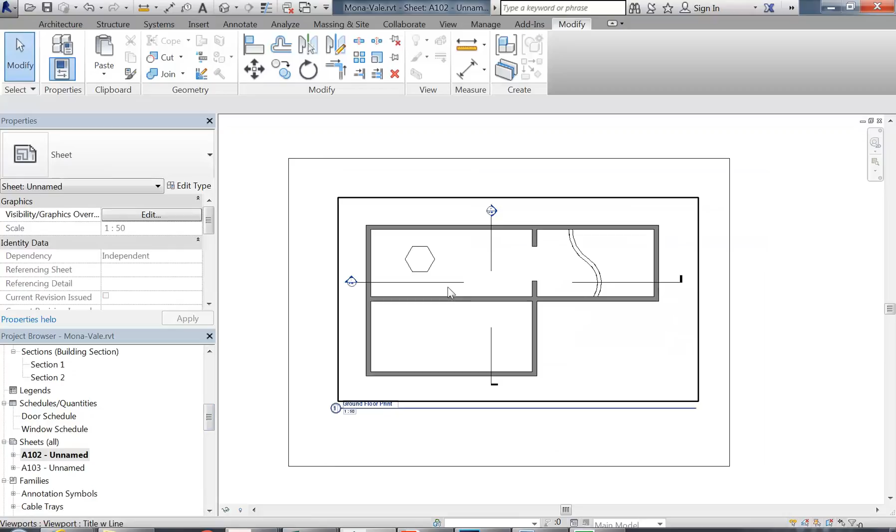That's A2? Yep, yep. So you probably won't do it that quickly your first few goes, but once you get used to it, this is something that shouldn't take you very long. So as I add more to the design, of course, these views will still be there, and I can just come back anytime and print out my ground floor, my sections, they're all ready to go. Don't worry about these borders going around the outside of your views, they can be hidden anytime. So there we are.